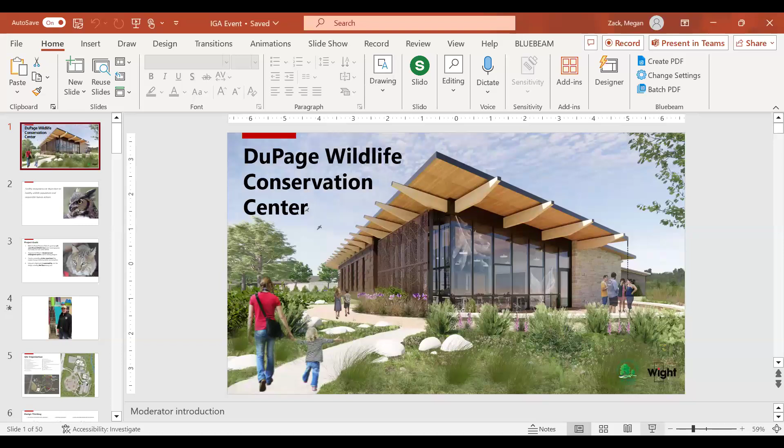Hi, good afternoon. Can you hear me okay? Yes. Sorry, I'm trying to get my video on. There we go. All right, I'm in action. Thank you. Sorry for the delay.

Well, I will go ahead and get started. DuPage Wildlife Conservation Center, located in Glen Ellyn, Illinois, is a 27,000 square foot new wildlife rehabilitation clinic and visitor center. The project started over 10 years ago as a master plan for the DuPage County Forest Preserve. The wildlife clinic and facilities were seen as essential investments to the overall mission of the Forest Preserve, a mission to protect and educate the public about Illinois' native ecosystem.

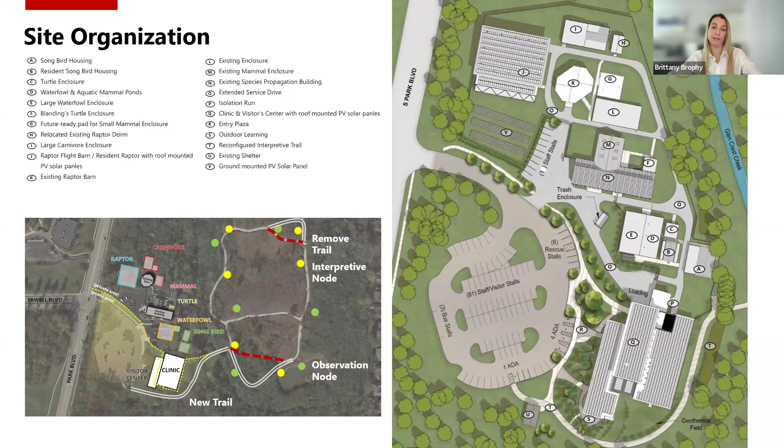The design concept is based on 3 organizational strategies. The first is looking at dividing the public and private spaces for animal and human use. The second is site orientation and optimizing renewable resources like solar and geothermal with an effort to preserve as many existing trees as possible. Lastly, creating a welcoming atmosphere for visitors while displaying the objective behind the clinic.

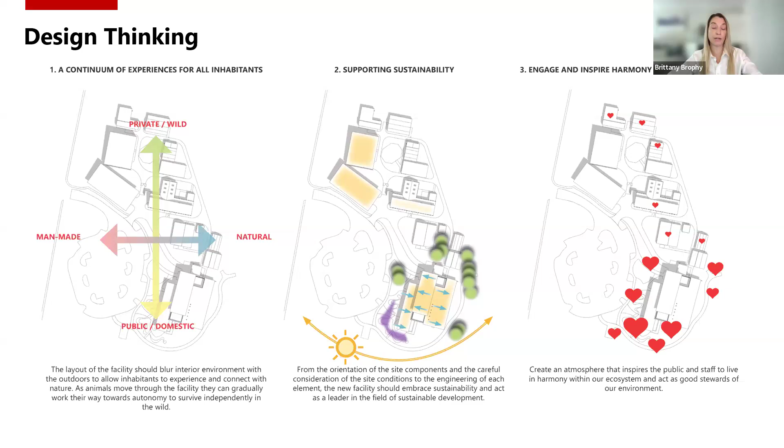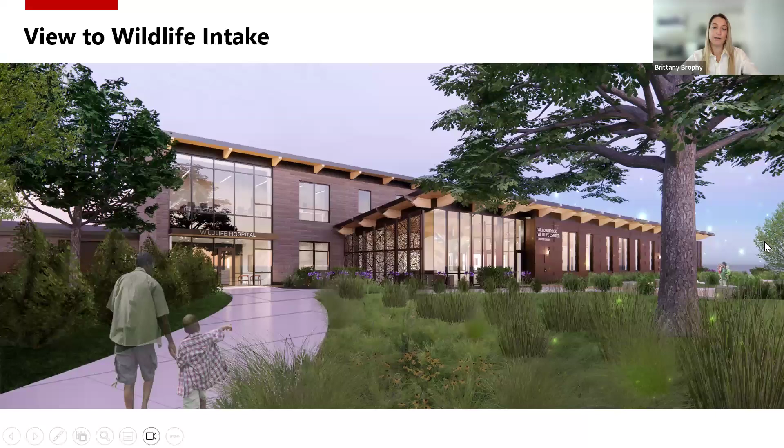Since the project's still under construction, we will share with you our vision of the wildlife clinic. Much consideration went into the selection of the exterior facade materials. We designed a building envelope with consideration for each material's embodied carbon footprint, durability, and color palette to blend into the natural landscape. There's a variety of textures, earth tones to the facade, as well as two different entry points, one for visitors and then one for animal rehab.

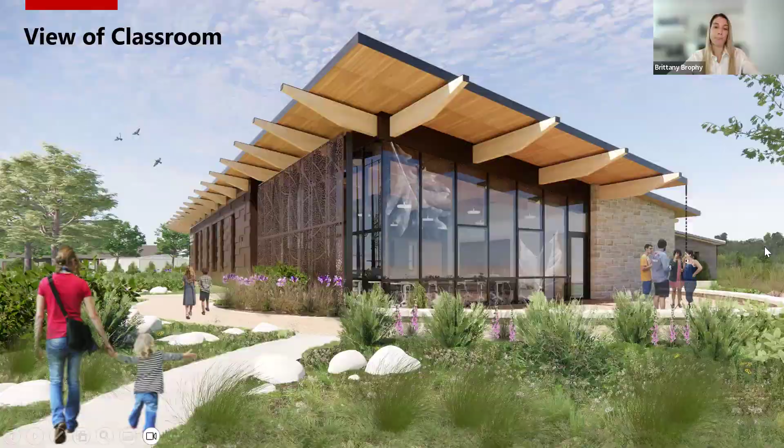By using a 2-inch by 4-inch spacing to the pattern, you can reduce the impact for larger species, and a 2-inch by 2-inch for smaller species like hummingbirds. The client wanted to use native Illinois tree leaves as inspiration for the educational purposes. We used these images and created a dot pixelated graphic based on the shape, the capillary veining, and shadow of the leaves. We placed these custom leaf patterns on all the main entry points for high impact.

For typical punch windows, we use more of a standard scattered rain pattern, all within that 2 by 2 spacing. The patterns are to be implemented during the fabrication of the glass using a translucent ceramic frit on the number 1 surface.

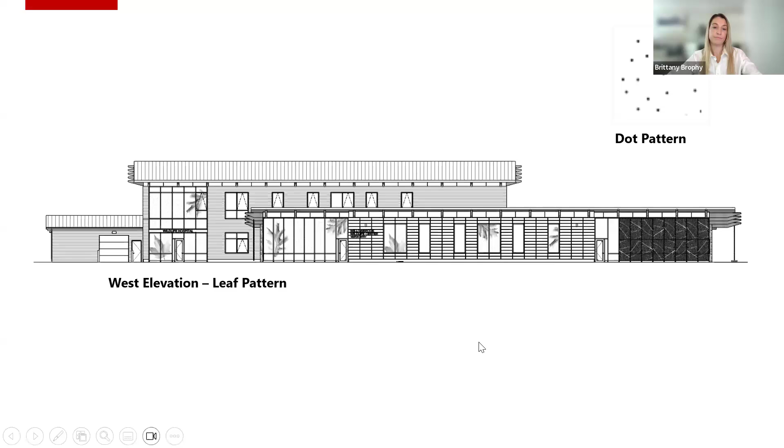Now look at the floor plan. Most of the program is located on the first floor, with the exhibit in yellow towards the front, clinic in orange, more of the central core space, and the rehab in green around the perimeter to maximize daylight. Working with the client, everything needed to be as compact as possible for circulation efficiency.

Much like a human hospital, animals come through the emergency intake and are sent to triage for observation. Then on to the lab for x-rays or surgery. And once completed, they go to ICU for recovery, and then on to rehab, and eventually are placed in the exterior housing structures, then released.

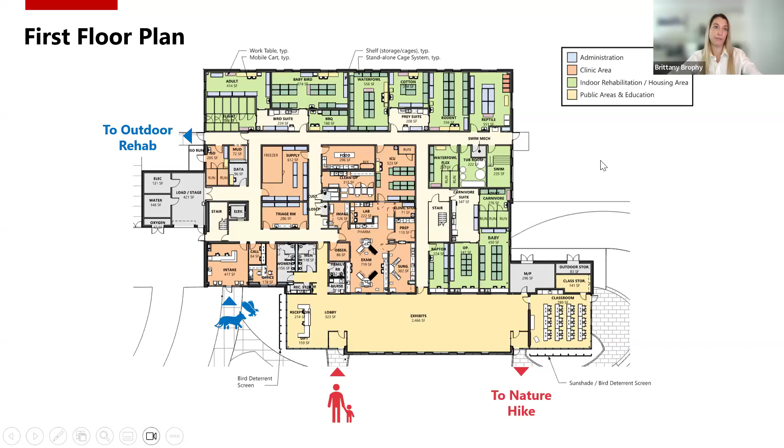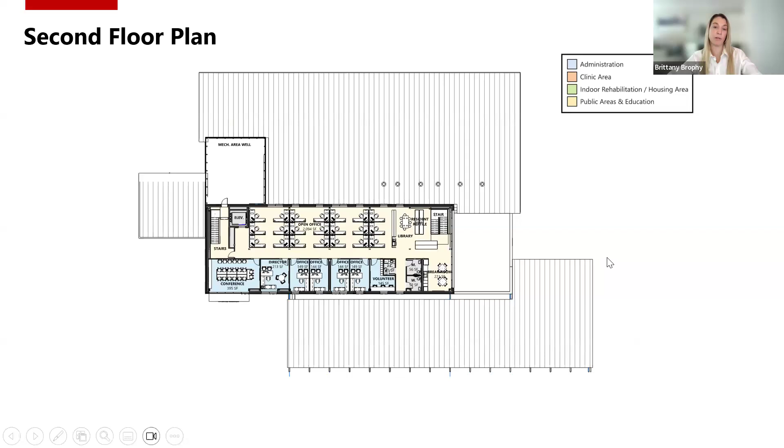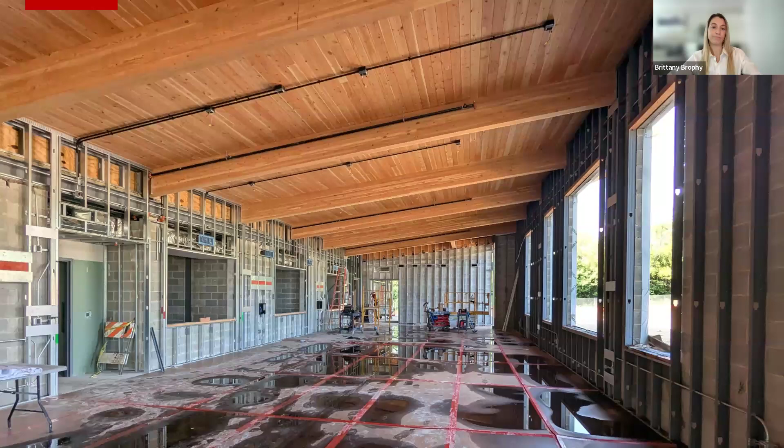The second floor is more of a human-based working space, with an effort to keep the staff separated from the busy animal spaces below. The interior finishes are inspired by the life cycle of a sugar maple leaf. Many of the materials are drawn from the leaf's seasonal color palette, much seen in the exterior renderings. The client was interested in a warm, welcoming look and less industrial.

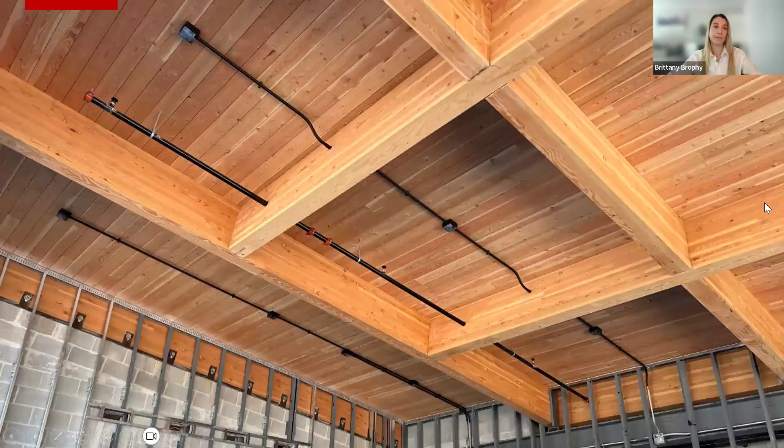A huge element in creating that atmosphere of the exhibit space is the timber beams and wood decking. You can see the level of coordination effort it takes to organize the fire sprinklers, electrical, and mechanical components. We strategically placed the majority of mechanical ducts inside the south wall, left here, to avoid cluttering the structure. We used hidden or concealed connections at the beam's cross sections where the roof overhangs in two directions.

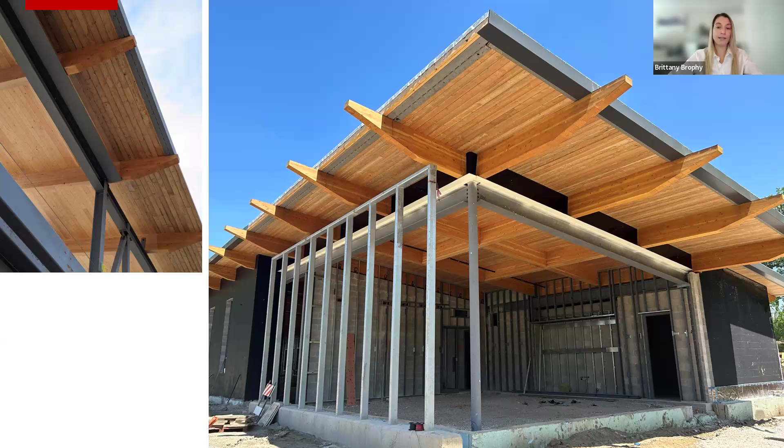Our structural engineer would often say, there's no such thing as a moment connection with wood. So to reinforce this, we use a hybrid of steel columns and beams to support the wood beam cantilevers. Another important factor for the forest preserve was maintenance of the wood. We used a log oil finish as well as a bee repellent that transitions at the building envelope. You can see the color difference in the image on the left between the interior and exterior wood.

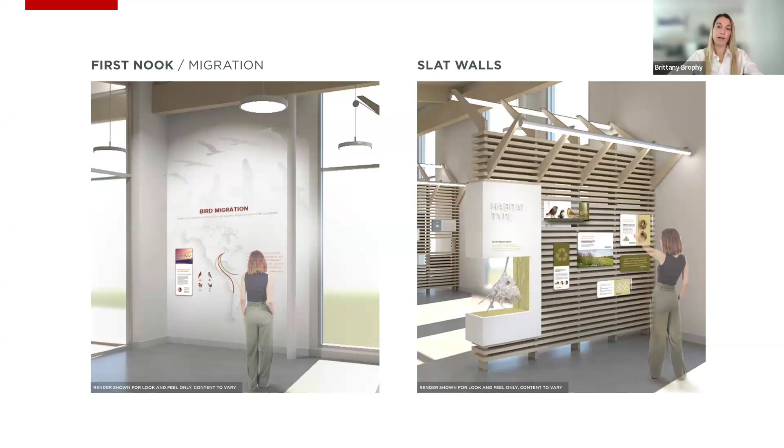We worked with an exhibit designer to enhance the visitor experience. You can see a few elements here, educating the public on ways to preserve the natural environment. The exhibit will also have windows peeking into the clinic spaces, showing activities like exam, surgery, or a visitor favorite, the baby animal rehab.

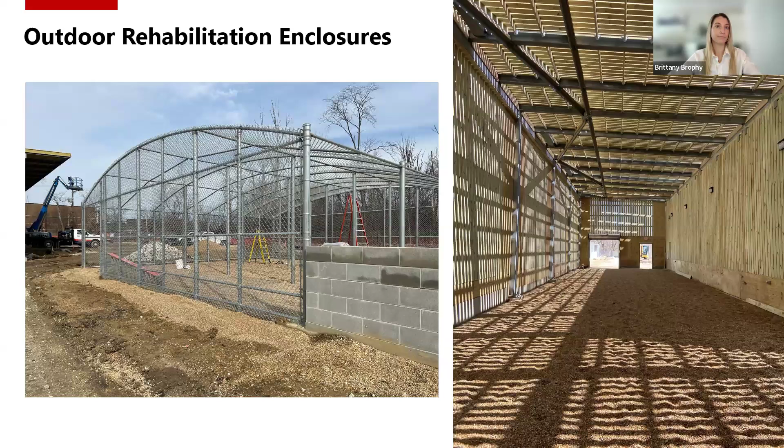Thanks, Brittany. I had the same issue trying to get my camera on.

So shifting gears, I want to give you a little bit of background on our sustainable focus, energy reduction and designing for wildlife. So let me go to the next slide. Okay, so very early on, we had a really amazing client who came to us, and one of his early requests was to incorporate solar. We were like, no problem, we can absolutely do solar.

This is the president of the DuPage County Forest Preserve Board, and he had previously put solar panels on the existing building, and he put them on his home. So he knew the payback and the importance of incorporating that early into the project. So at our first charrette that we did with the community, we talked about adding solar. We also got a lot of feedback about all of the other sustainability elements that people are excited about in the forest preserve. And we clumped that into these 4 sustainable priority buckets: health, social, environment, and economic.

So obviously this is an animal hospital recovery center. The goal is for these animals to be released back into the wild. So health is a very important element. We're also trying to educate people. We want to make sure everyone from the community can participate and be part of this space. Obviously, environment is a huge element. The building, as Brittany mentioned, is set into the forest preserve. And the idea is for it to blend into the forest preserve and not stand out.

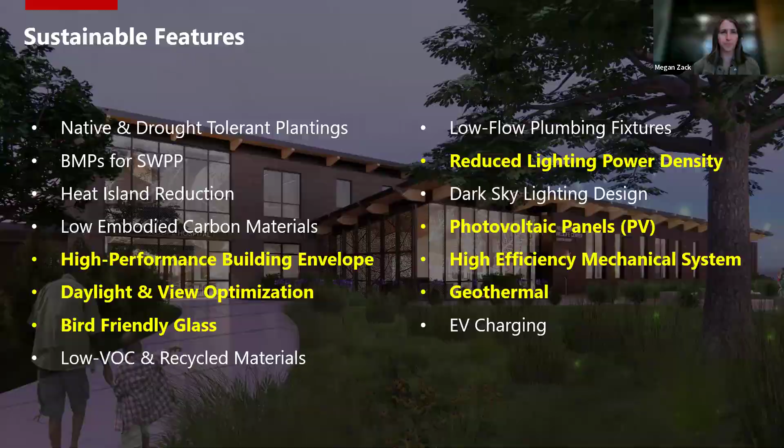So just to make sure everybody's on the same page, the definition of a net zero building is a building that makes as much energy as it consumes within a calendar year. And we are getting a grant for this project, so we will be going through the verification period and proving that we in fact are a net zero building.

Okay, when you design a net zero building, step 1 is to reduce energy. So like I said, all of the energy you use has to be offset by solar or some other type of renewable energy. And so the more energy you use, the more solar panels you need, and they're expensive. So number 1, we tried to make a very tight building enclosure.

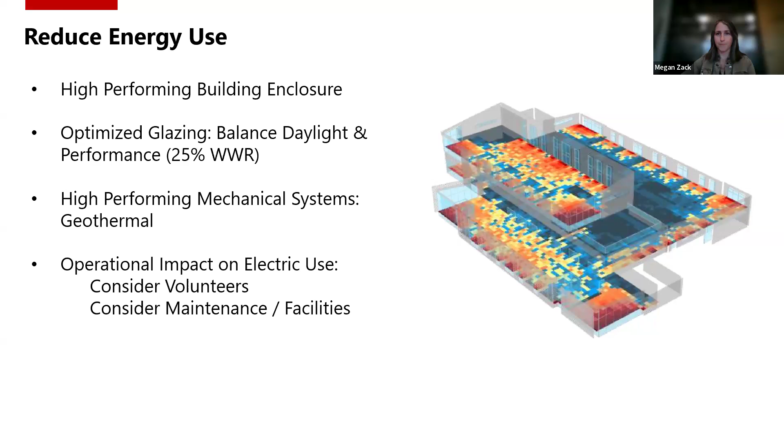And then, of course, we used high-performing glass and thermally improved windows. We used a rain screen here, and that helps with the water and the drying time. And then we've hired a third party to do a blower door test, again, making that envelope tight and then making sure it's actually installed the way it's designed is very important.

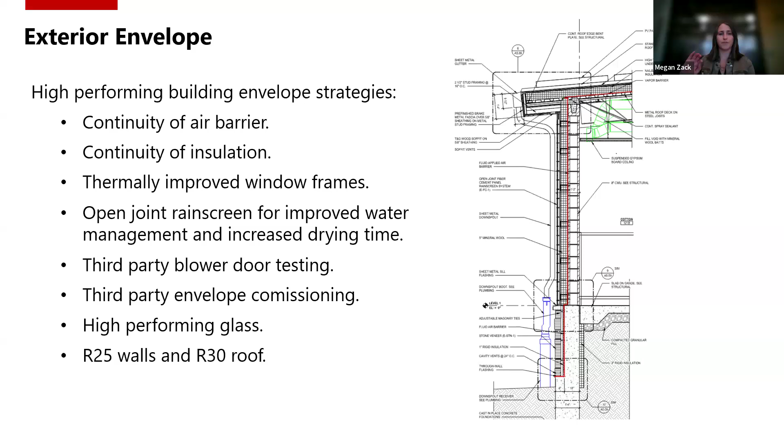And we're lucky to be working with our own construction team. So we had all of these conversations very early on. And then, of course, getting that third party envelope commissioning agent on board sooner the better. That is definitely a lesson we learned on previous projects.

That's huge. And then all those little incremental changes, that was based on updates and improvements to the envelope. And then that last change, which is the next big jump, still smaller than the mechanical system, that is tightening that envelope and making sure we incorporate the blower door test to make sure it's installed properly. And that's where we got with our EUI. So like I said, absolutely making your building as energy efficient as possible is step one for net zero.

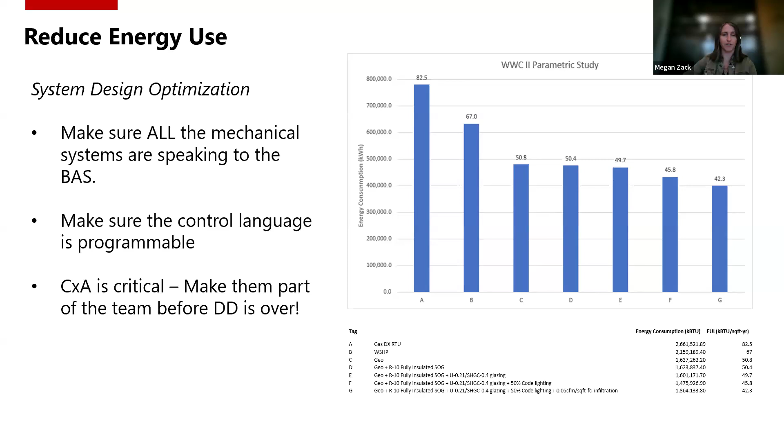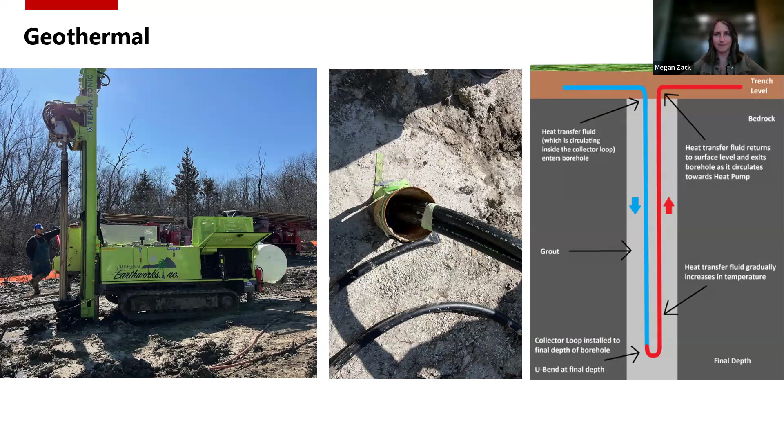So we did all of these things, and then we ran a solar analysis to see how many solar panels we need. Kind of as a rule of thumb that we learned from our first 3 net zero projects was that for about every square foot of internal space, you need about a square foot of solar panel. Not when it's a hospital.

So we have an extremely intense use here. We have a lot of ventilation requirements. It's open 24 hours a day, 7 days a week. There's surgeries, so the lighting is high. There's warming pads in every single one of these recovery spaces. So it's a very, very energy intense space.

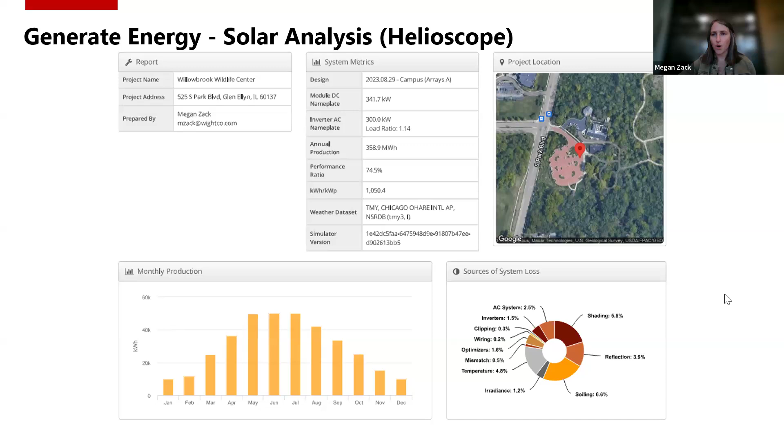So we ended up with about 3 times as many square feet of solar panels as we have space in the building, and that's after making it extremely efficient. So that main clinic and visitor center is completely covered in solar. We also have covered the Raptor flight barn. The images that Brittany showed of that is completely covered or will be in solar panels.

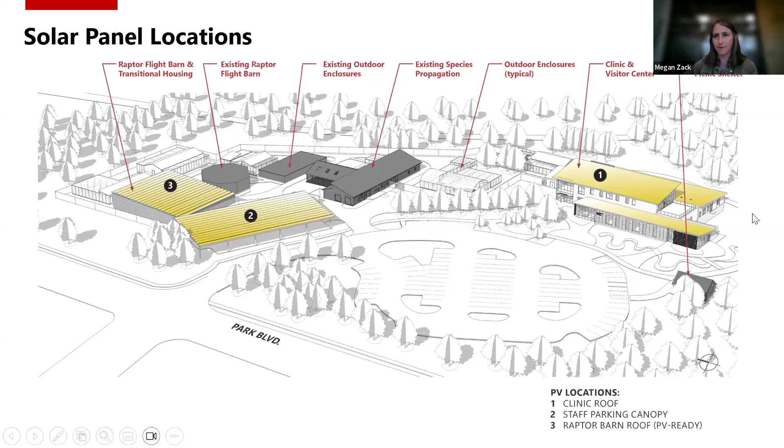Okay, so what were our challenges? I was going to get to this. So super intense energy use, like I mentioned, it's a hospital. So, you know, that verification period, we're going to have to very closely monitor all of the things that are happening to make sure that we're not using too much energy.

We're located in the forest. So we had some really big trees that we wanted to save, and we did. George will tell you a little bit about that. But unfortunately, they were shading our building. And so making solar work in shade is not great. So that was definitely a challenge.

This building was starting during COVID. And so I'm sure you guys all remember there were huge supply chain issues. We also had huge cost increase issues. So, you know, before COVID, things cost X, and then during COVID, that number just kept getting higher and higher. So that was definitely a challenge.

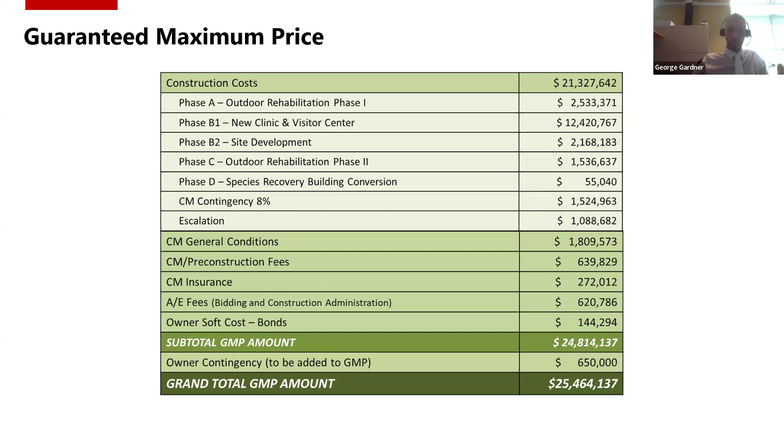One of the key challenges that we faced was maintaining full operation of the existing clinic throughout construction. The facility needed to remain open to allow the staff to continue treating patients. And to accommodate this, we had to divide the project up into 3 different phases.

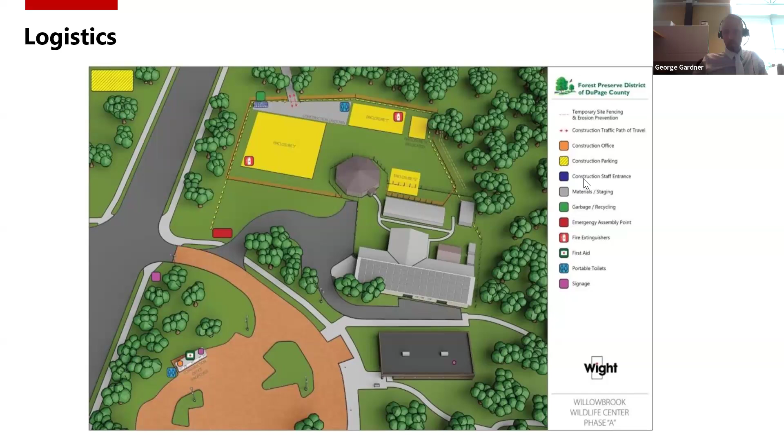Phase A, shown here, involved constructing the animal enclosures on the northwestern half of the site. Phase B, which includes the new clinic and visitor center, is currently under construction, nearing completion. And then Phase C, set to begin next month, will involve the demo of the existing clinic and the addition of more enclosures. So this phased approach was necessary to make sure that the clinic's operation remained uninterrupted.

Phase A started in October 2022 and was completed in spring of 23. Phase B began in August of last year and is scheduled to be completed fall of this year. And we're anticipating that we'll have a Phase C completion in early 2025.

It's also important to point out that in our design-led, design-build approach, construction is integral long before the boots even hit the ground. So we're constantly collaborating with our architects, engineers, designers to address budget challenges, constructability issues, and that goes a long way towards aligning the team's goals and ensures a smoother project delivery.

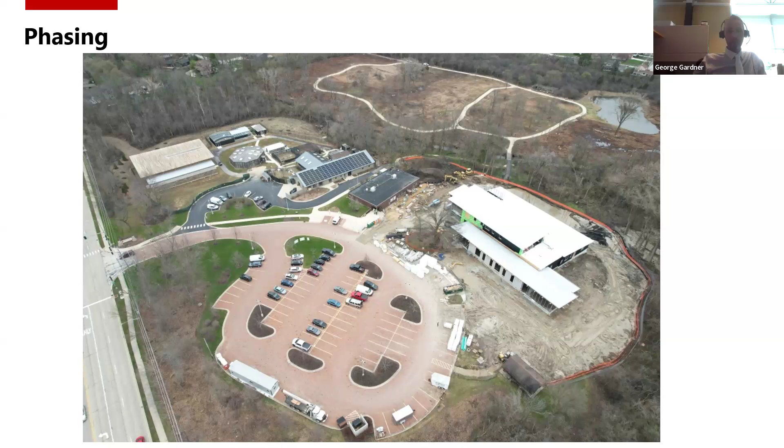This method eliminates the typical finger pointing or financial finger pointing that often occurs between your construction manager and your designer, or construction manager and architect, and also fosters a more collaborative atmosphere where we're all working towards the same goal.

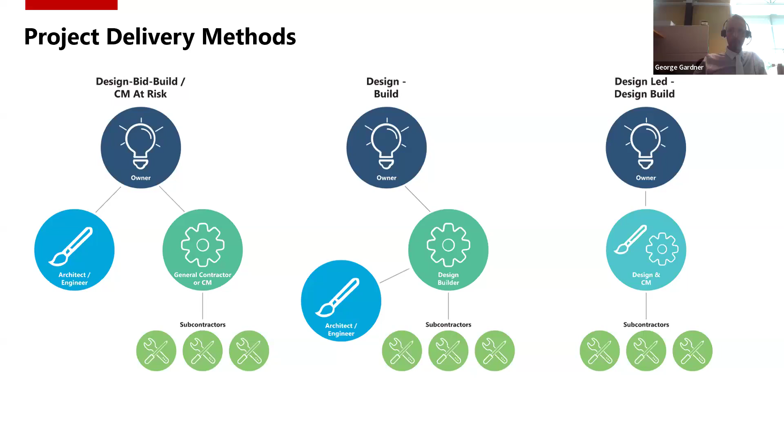A benefit of this approach is the constant communication between the team. Design, engineering, construction teams, we're all working together as one cohesive unit. We're not fractured, we're not split apart. And this helps ensure that the project vision is maintained across every phase, and also results in a higher quality product where all the details are carefully coordinated to meet the project vision.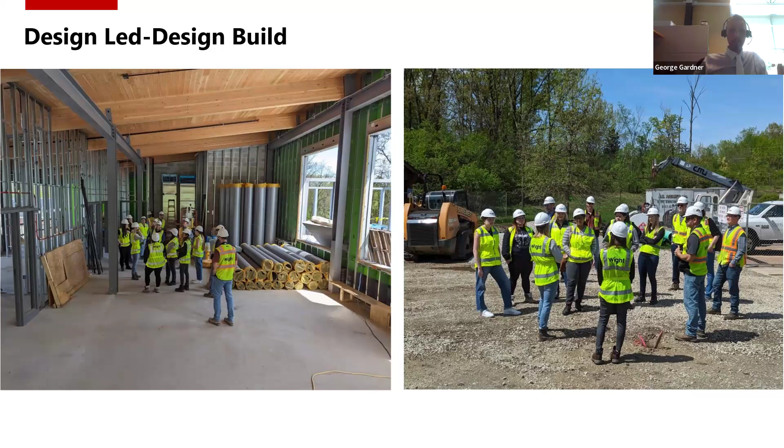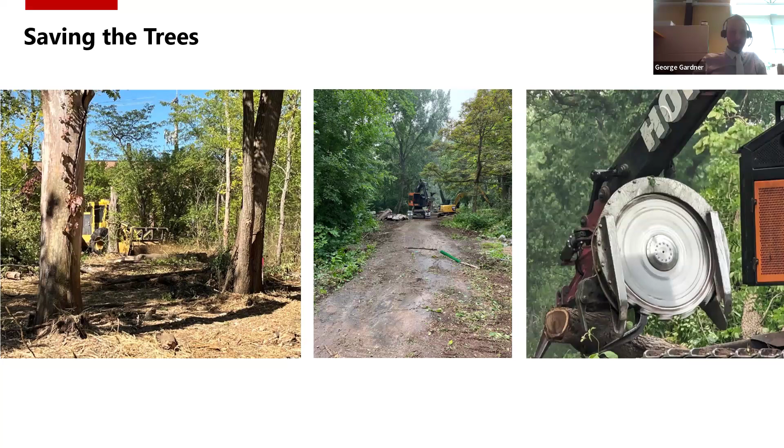Construction's early involvement in the design process allows us to engage more deeply with the project's goals, including the environmental goals. As an example, through collaboration with the design team and the client, we're able to reduce the number of trees in multiple areas that were scheduled for removal. In one example, we were able to reroute a walking path to preserve a large oak tree that would have otherwise been removed by the straight walking path. So now it's kind of a curved path around the tree and adds a bit of character to the project as well.

One of our biggest issues, and Megan had kind of touched on this, is the water management. It has been and remains a significant challenge on this project. Due to the topography, there's a large grade change at the location where the new clinic sits, which by itself would be challenging enough.

But when we were drilling the geothermal wells, we encountered an underground water seam about 350 feet below grade, and it was producing 100 gallons of water per minute for the additional drilling to get to the depth of 450 feet. And this is times 58 wells. So managing this excess water definitely required some creative solutions, and we had to store and divert what we calculated to be about 500,000 gallons on this project.

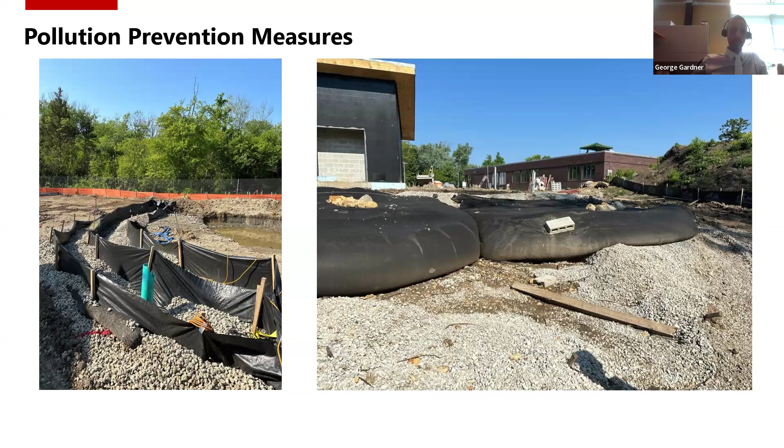Some of the responses to this: we implemented a series of prevention measures, including digging borrow pits for water storage, using silt bags to filter out sediments, and installing silt fences and rock check dams throughout the site. But there was no one solution. It was a constantly evolving solution. So instead, we had many iterations and layers of pollution prevention measures that we had to implement during the drilling process.

So as Megan had said, the building envelope is one of the most important components. And with any high performance envelope, attention to detail is crucial. So in the design phase, the plans and the specs, that's your first line of defense. It sets the expectation, but the execution on the site is the other half of the equation. Part of our role is to enforce these details, and we're constantly monitoring contractors' work to ensure that they use the approved materials that they had submitted on site, but also follow the specifications to the detail. And that oversight's critical in achieving the long-term performance that is expected of the design.

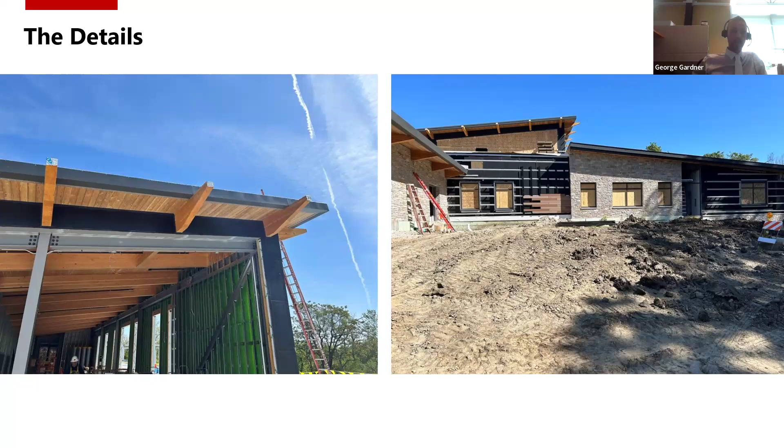Sustainability is at the heart of this project. We've met with and worked closely with our waste recycler to optimize how materials are sorted and disposed of on site. So not only does that keep their operation efficient, but it helps us to minimize the environmental impact that's often seen with traditional construction.

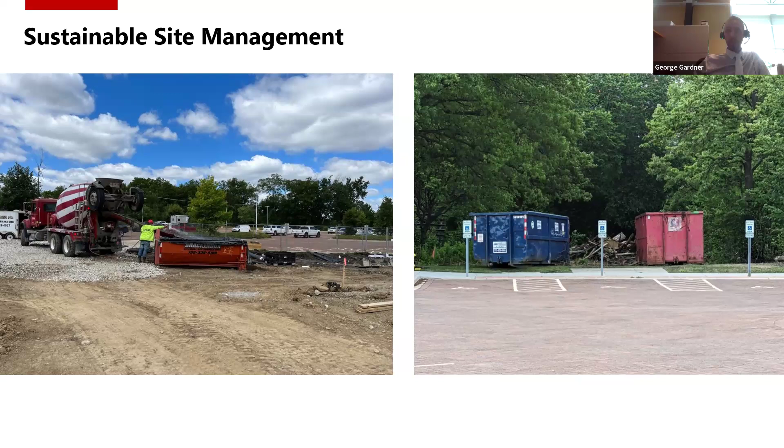Coordination for this project has been essential. We're literally building around an active facility, and it's not just an office building, it's an animal clinic. So some of the animals, which they call patients, are extremely sensitive to noise. Some are sensitive to dust, some even sensitive to human presence. So to mitigate these, we've had to implement dust screening, water spraying, staggered construction, different construction times. We've utilized temporary entrances to divert the traffic.

I'd say, though, the most effective tool in our arsenal has been communication with the client. So we meet with the client and the facility staff every week to ensure that our activities are well communicated, well understood. So we're not just looking at this through a construction lens, but we're receiving and understanding the feedback and getting it from their perspective.

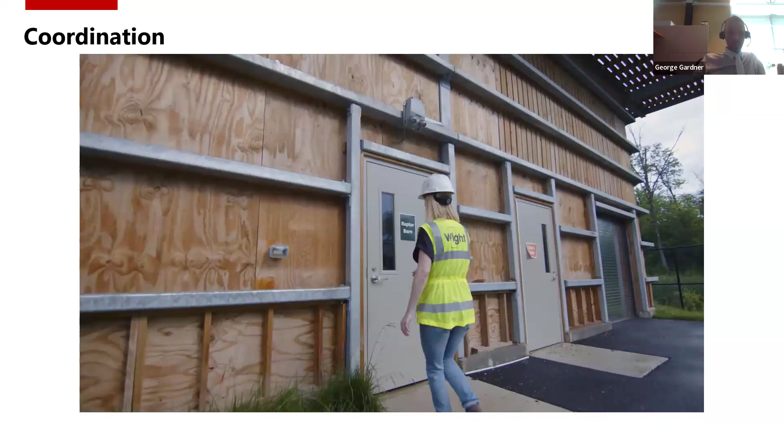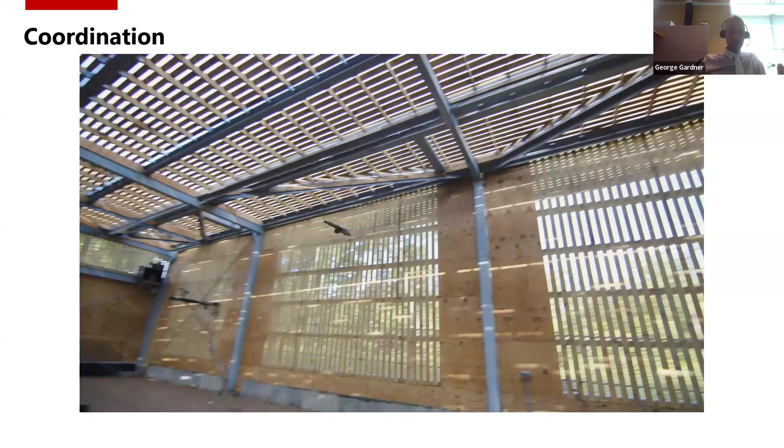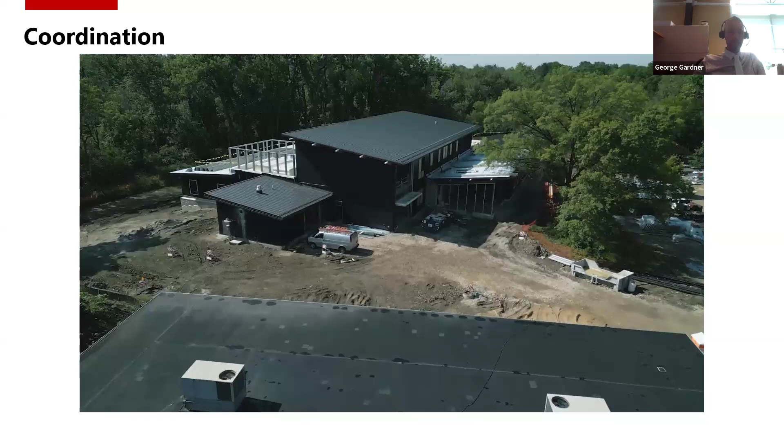This project has been a unique blend of challenges and successes, from maintaining operations in sensitive environments to navigating all the unexpected site conditions. We've approached every hurdle with a spirit of collaboration and innovation throughout this project, and the design-led, design-build approach allowed us to be agile, responsive, and committed to the project's goals and successes. I do speak for the entire team that we're proud of the work that we've accomplished so far, and we're really excited to see the project through to completion, knowing that it's going to provide a long-lasting benefit both to the community and the environment. Thank you.

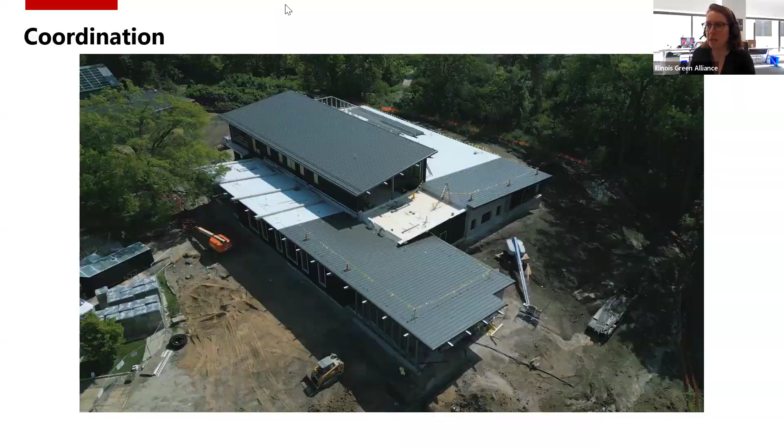So first question: if you found an aquifer when drilling your boreholes, how could you grout without pouring grout into the aquifer, essentially displacing its water? So I'll take this. When it goes in there, it actually kind of dams up the water. So that actually helped us when we started that process.

Great. Is the newer part of the parking lot permeable paving? If yes, where is the excess water sent? The existing parking lot is permeable paving. There is a new portion that will just be asphalt, but it's all graded to our BMP areas.

Great. I had a few questions myself that aren't in the Q&A, if that's all right. Megan, at the beginning, you spoke about this project not going for PHIUS. And then I was surprised that you guys are doing the tight envelope, you're doing the blower door test. So I just wanted to see if you could speak to why that decision was made not to go for that certification.

And before I jump in, Scott joined us here. Scott unfortunately couldn't be here to speak, but he's here to help answer questions. He was on the team from the very start. He runs our Chicago office, and he was the architect that started this project with our client. So he might have some more insight into this.